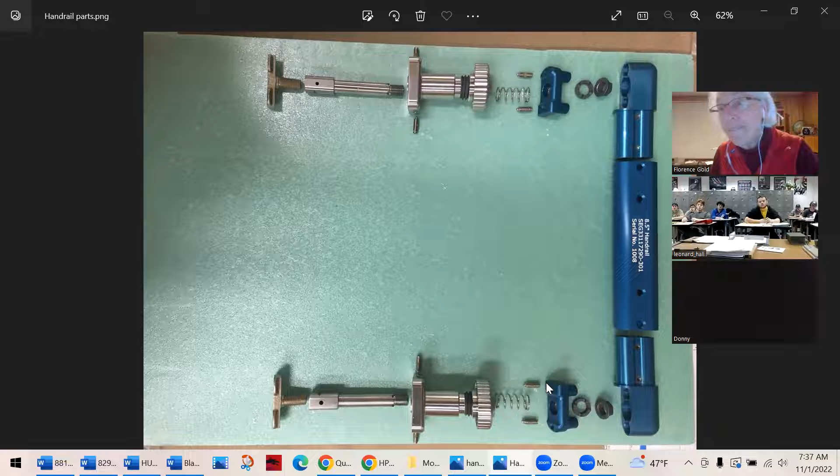Oops. All right, first I want to show you a little bit about, do you see the handrail? Yes. And the part you're making is right here. Is that right? You're making the tube fixture? Okay. Yeah. And you see how beautiful it is in a nice anodized, I believe, blue color? Because the astronauts actually hang on to part of that. Part of it slips into this tube, but this part is out of it. And it has to be like fine jewelry. It has to be smooth as silk, and it's a beautiful part.

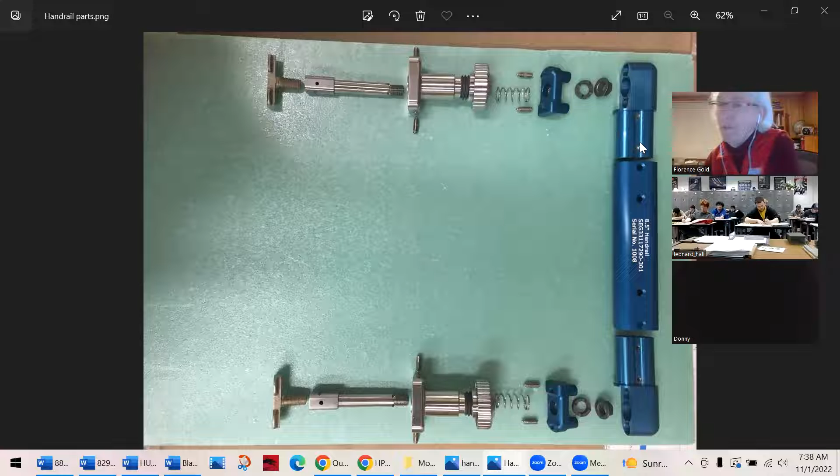The handrails are beautiful. And if you look at the space station, there's handrails of all different lengths all over the space station. And sometimes the astronauts grab it with their hands, but sometimes they put their feet under it to hold them down in place. And if we have time, I'll show you a video with that. But this is the tube fixture. I actually have it right here also. Whoops. Here it is. And this part right here is the part that is actually showing, and this part here actually goes inside the tube.

And then you have another part that fits into it, and this is why everything has to line up perfectly. So this is called the fixture cap, this right here, and that goes right in there. And everything has to line up. This is a precision made part for the astronauts. We can't have any loose, shaky parts to it. But I wanted to show you all the parts to the handrail, and yours is an extremely important part there. Anyone have any questions about that?

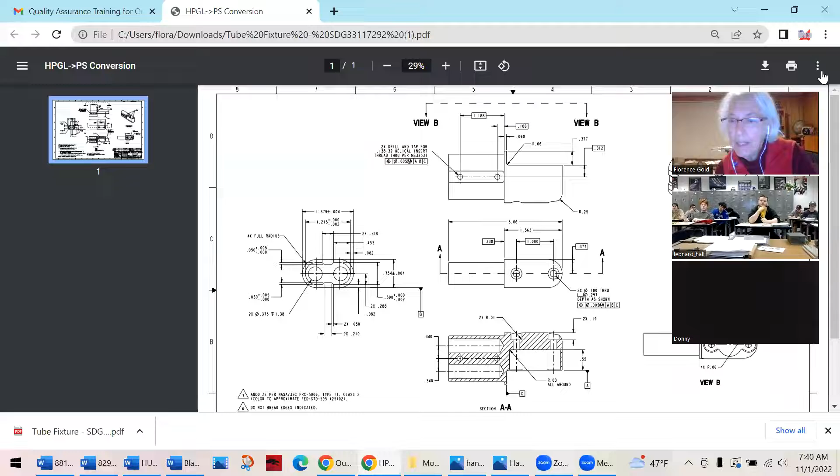Okay, so now I'm going to pull up the drawing. Let's see if I can find it in all my stuff here. Here it is. Do you see the drawing? Okay. And you have that drawing in front of you. So the first thing I want you to look at is down here, and I'm going to make this drawing bigger.

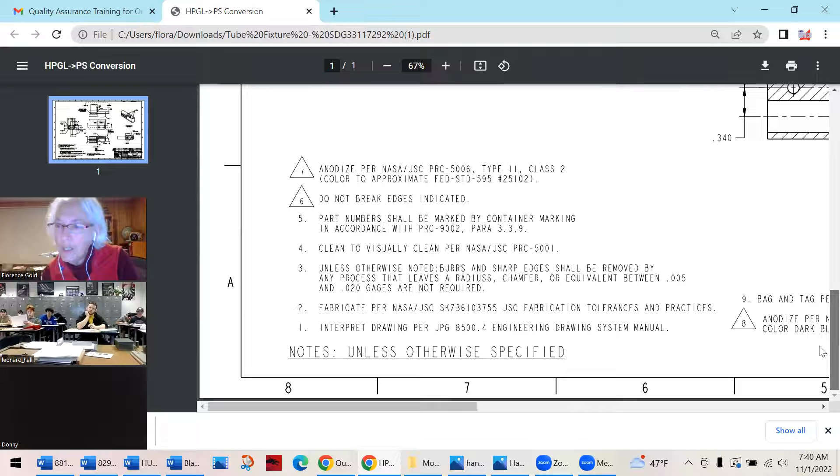One more. And go to the title block, which is right here. And this has some really important information that you need to copy and put onto some of the quality assurance documentation. But you need to make sure you're working with the right part. It's called the tube fixture for the handrail.

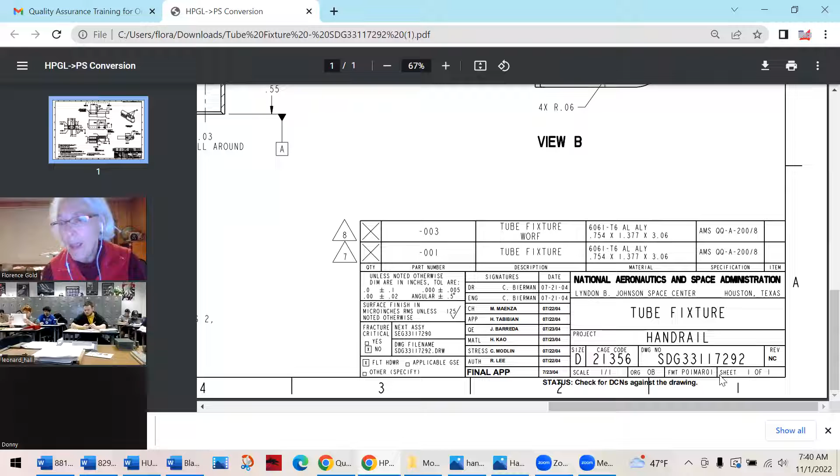And to double check, we put a drawing number for all our parts. It has this number down here, and all these numbers for all the parts that I have seen are pretty long like this, and they usually start with 3 letters. And we have here SDG33117292. That is the drawing number that goes on when you actually are making a baggie for it with labels that has that number. It's a very important identification number because every single little part you saw on that drawing in the handrail has one of these numbers besides being a title for it.

The other important part is right next to this number, and it says REV. REV, NASA loves abbreviations and acronyms. REV, anyone know what that stands for? Yeah, it's revision. And this has NC, which is no change, I believe. So the revision is no change. They did not change it.

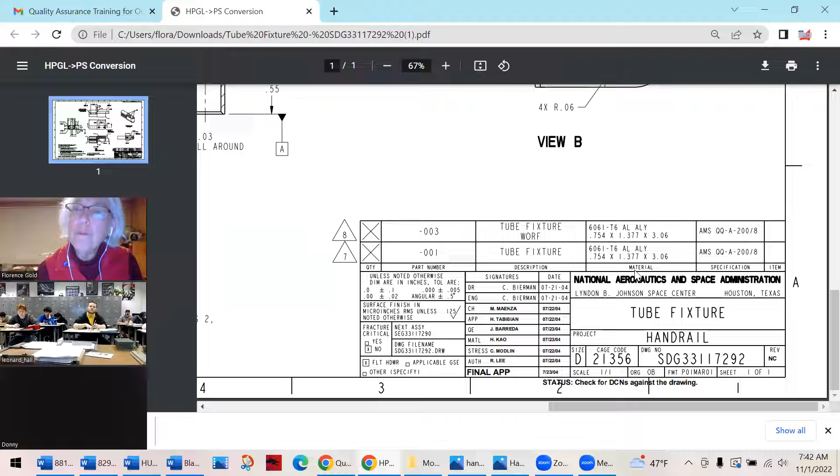But here above, right here, can you all see my cursor when it's going around like that? Okay. Above the word material, and you have it on your drawing, and we never do the WORF. We always do the plain thing that says tube fixture. So we're doing the -001. Above the word material specifies the type of aluminum alloy we are using. And there's all different types of aluminum alloy.

We're using the 6061-T6 aluminum alloy. Under it is a number, and that is measurements for a rectangular bar to purchase, but we don't go by this number. We go by what the teacher thinks is appropriate for their machines to build this tube fixture. So the only important part above material is that 6061-T6. We have to have that on our documentations, where I will show you in a minute.

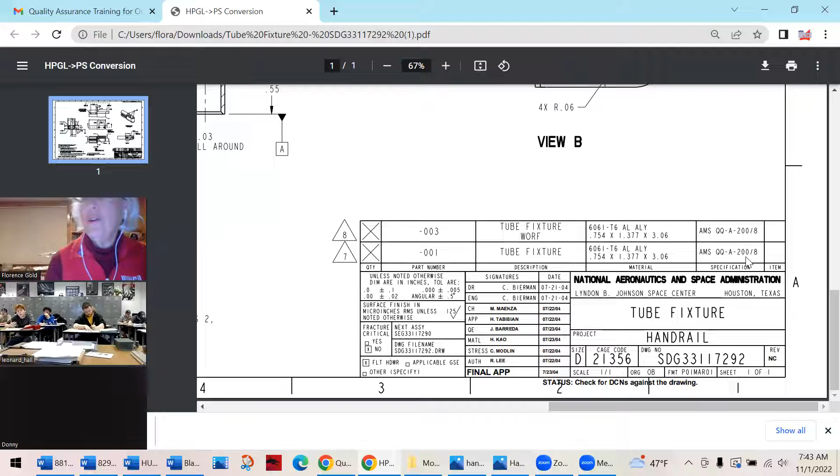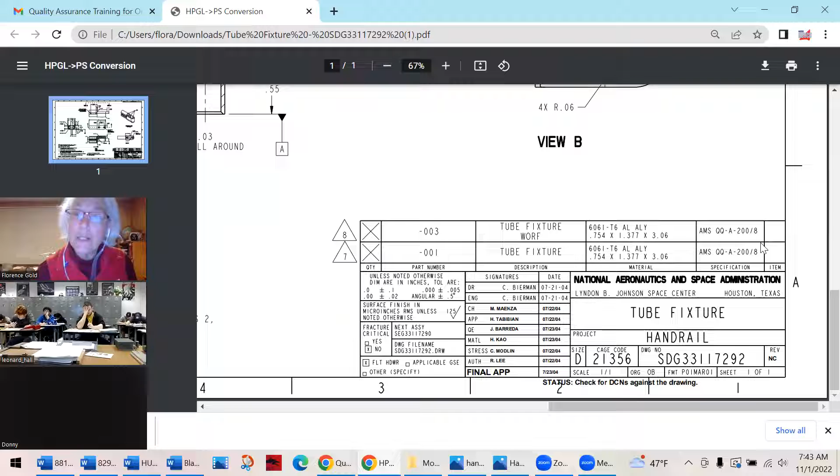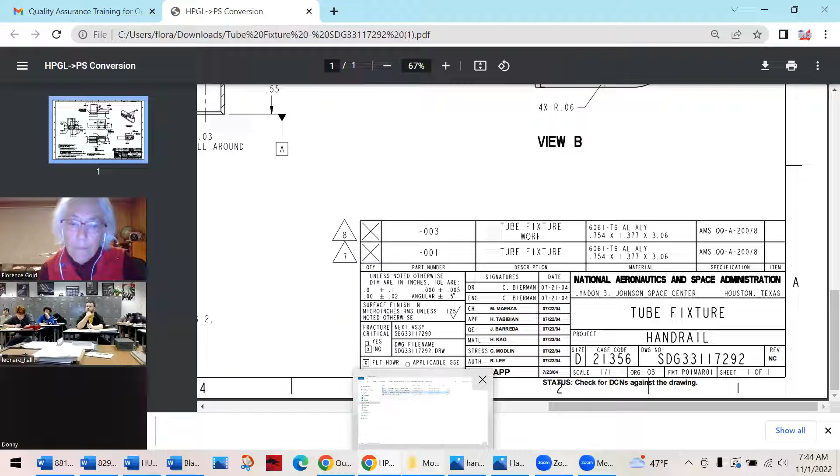And then the other thing is the specification right next to it, the word specification, the AMS-QQ-A-200/8. That specification also has to be on our documents that we include with our parts. And that specification and the material will be listed on what we call the certificate of conformance, which I actually think I might show you now if I can find it. Wait a minute, let's look here if it's here. No, it isn't there. But I will show you the certificate of conformance shortly.

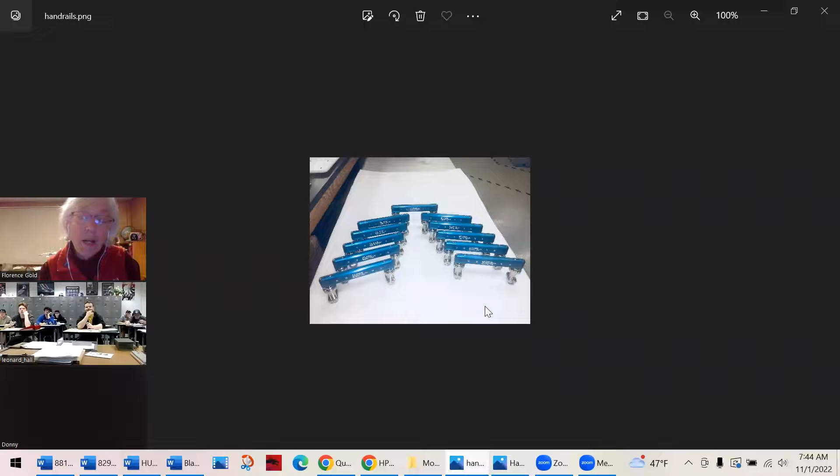Oh, here's a nice picture. These are the finished handrails. We sent already 11 up to the astronauts, and they want more. So you are working on sending more handrails to the astronauts.

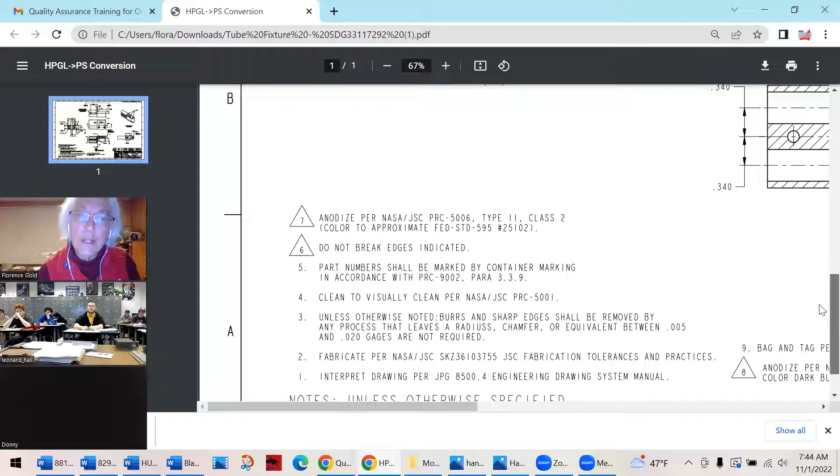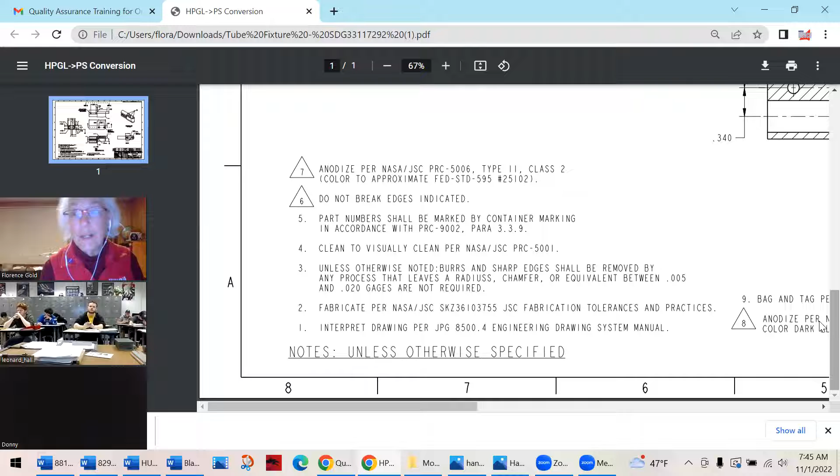Okay, let's go back here. The notes are very important also on the drawing, and the notes are usually found in the bottom. Note 7 says anodized per NASA. Guess what? You do not anodize it. We will anodize it. Actually, we send it out to a shop to get anodized because that involves a lot of chemical process. It's a big process to anodize. But in order to get a beautiful anodize, that part has to be precision made and as smooth as silk, as finished as much as possible.

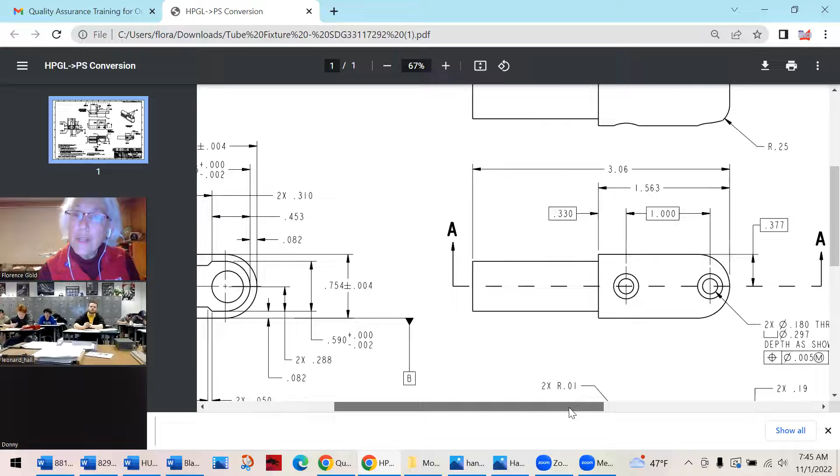And so note 6 says, do not break edges indicated. And that actually, I have never seen on any drawing except for this one, because we always want to break our edges. But on this drawing, we don't want to break our edges. I'm going to stop sharing because that's an important part. So here's your fixture cap. Everything is nicely rounded, no sharp edges, except one spot.

And that's right here, that this part of your tube fixture has to be sharp because this fits into it, and it has to be like one. You don't want a round edge there. Does that make sense? So you got to be really careful because always we want round edges, just not on this top right here, because this has to fit into it, and it just has to be continuous. So those notes on the drawing are really important. You need to pay close attention to all those notes.

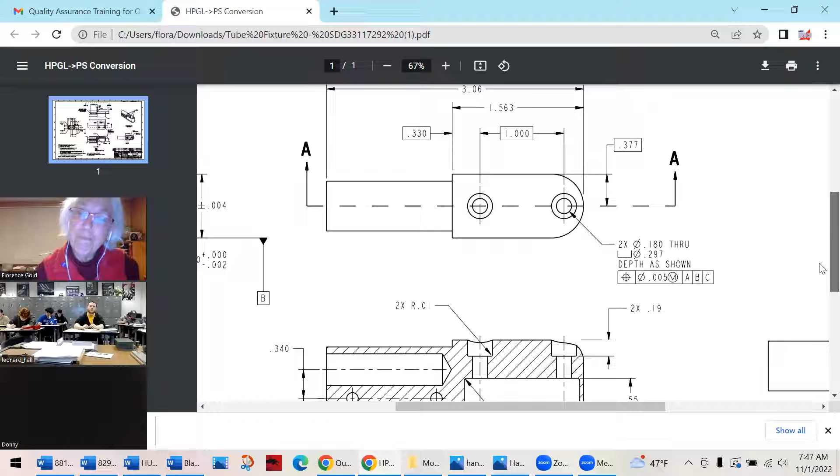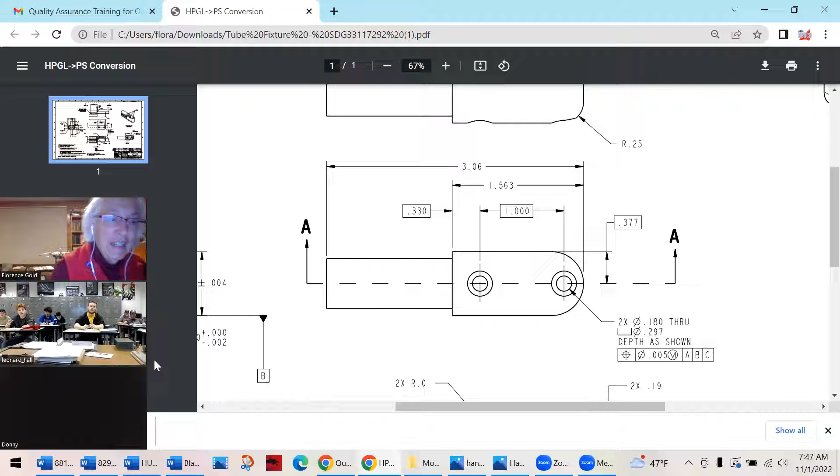The other thing that I don't see on this, but is on the test, is what does DIA stand for? And there's no DIA on this drawing. Instead, there's a circle with a slash through it. But my geometry students know what DIA stands for, right? What is that? Diameter. Diameter, right. What does R stand for? There's a lot of R's.

Radius. Right. Good job. When you all talk, I can really hear you. All right. So I don't ask about the R on the test, but I do say what is DIA. But you guys have this circle with a slash through it.

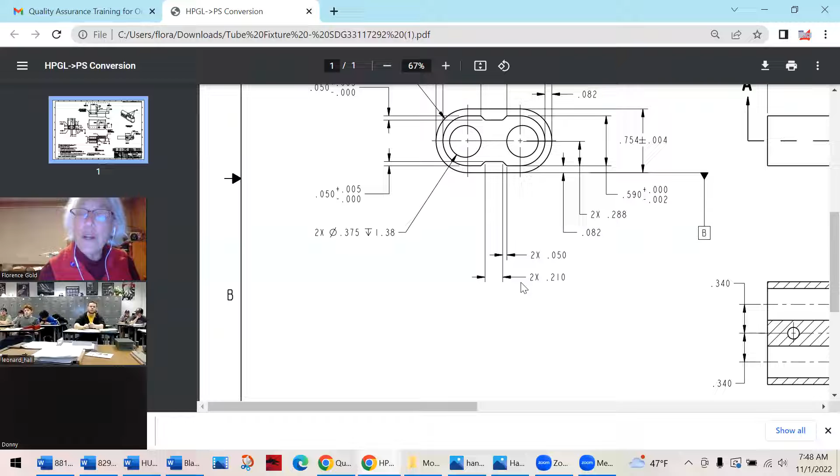Another very important part whenever you're doing any of the quality assurance work is the drawing takes precedent over any of these forms that I'm going to show you. And there's just 2 forms we're going to go over. But if the drawing says, hey, it's plus 0.005 of an inch and minus 0 of an inch, that takes precedent over whatever the quality assurance paper says. So when you're doing your quality assurance papers, you need to have your drawing right in front of you, because the tolerances in this drawing are the most important.

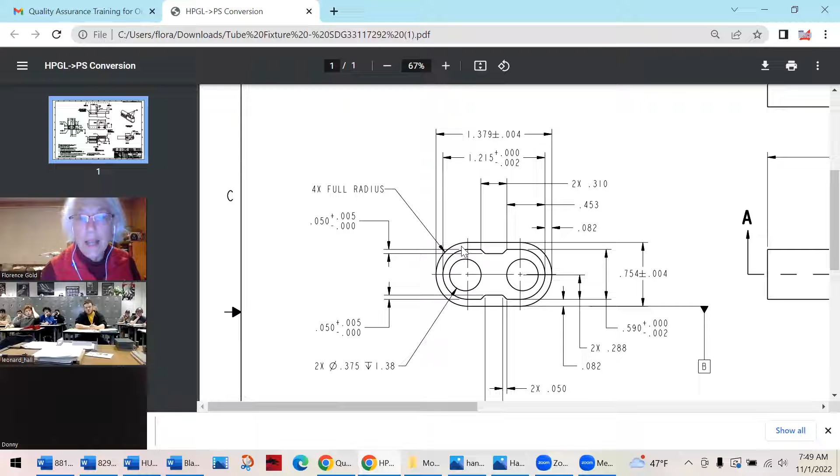There could be a mistake in the quality assurance paper. I have not had another person make a fixture tube. So you're one of the few who are making a fixture tube, and there definitely could be mistakes because not a lot of people have made this that I know of, at least. And the 4x means 4 times. 4x, the full radius. And you have special gauges to measure radiuses and diameters.

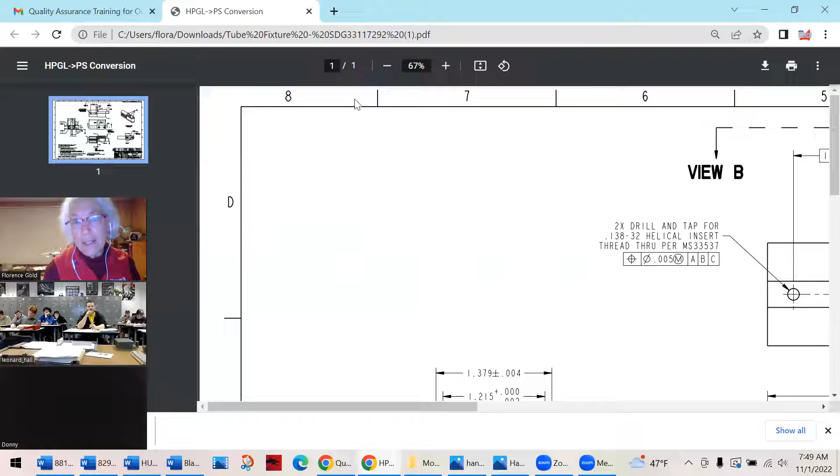And the only other thing I want to make sure you understand is how the drawings are like, I like to say, the Cartesian plane in geometry, because the Cartesian plane is the XY axis, and here the X axis, which is horizontal, goes across the top with numbers, and the Y axis goes vertical, and it has letters, and that's how you indicate where your measurements are.

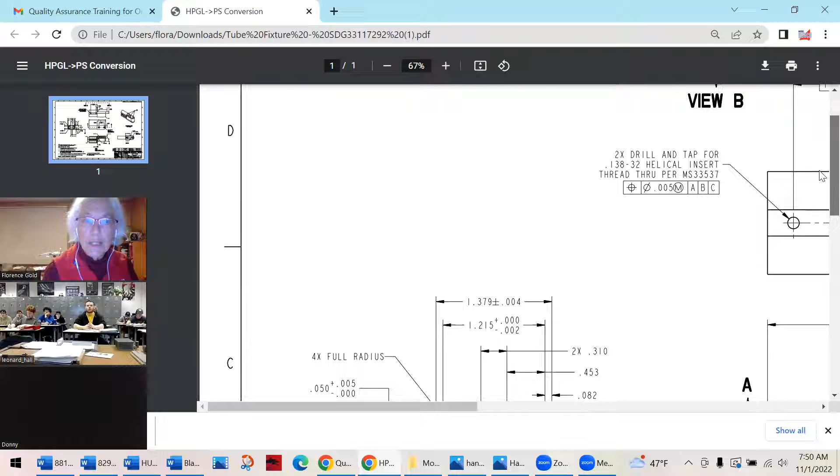So if I wanted a measurement in this area, that's C, it would be right in here, and it would be C8, right? Can't see C when I go to 8, but it's right in here. And we'll look at that again. I actually made this probably a little too big. So maybe now we can see it. This is in C8. This is in C7. But do you all know how to read that? Yeah. It used to be on maps, but you Google Map things now, but it's also in mathematics.

All right. So now we're going to start on the documents for this. And do you see the document now that says sub-assembly process sheet? And do you have a copy of it? So you can write on this, and I'm going to give you the first one of the questions on the test. There's only 14 questions on the test. The one question says that these quality assurance documents are legal documents, and any legal document, you should not use pencil. You have to use black or blue ink. So write that down if you can't remember it. It's a question on the test. Use only black or blue ink.

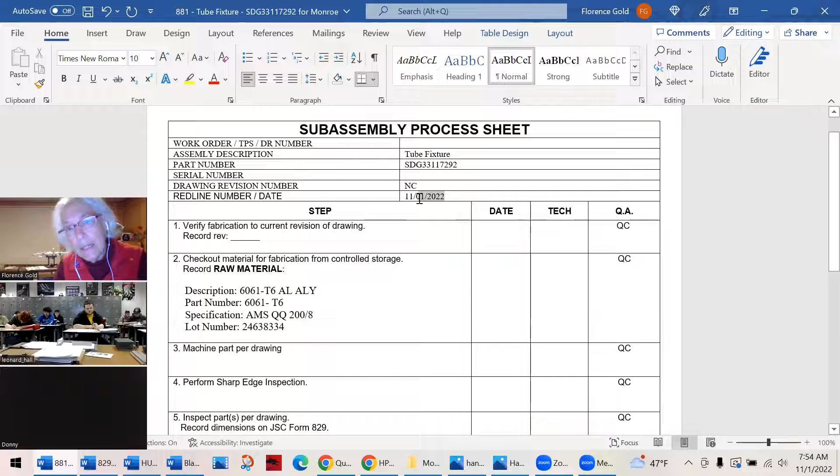And I like actually that you put it in this order, but the important thing is that you have the month, day, and the year. And that's a question on the test. Do you have to include the year? And I put out the whole year 2022 just to make sure, because the 22 could be a day of the month. So it's real important. I've watched quality assurance people check our papers, and if we didn't have the year on them, she had to go back and we had to put in all the years. So put in the month, day, and the year. That's real important. I'm gonna highlight it too.

So that was the second question on the test. First one, black or blue ink, no Sharpies. This one is you have to include the year when you put the date. And that's all you fill in on this square. Everything else really is filled in for you. But you have to remember to put the date. We don't have a red line number. We just put the date.

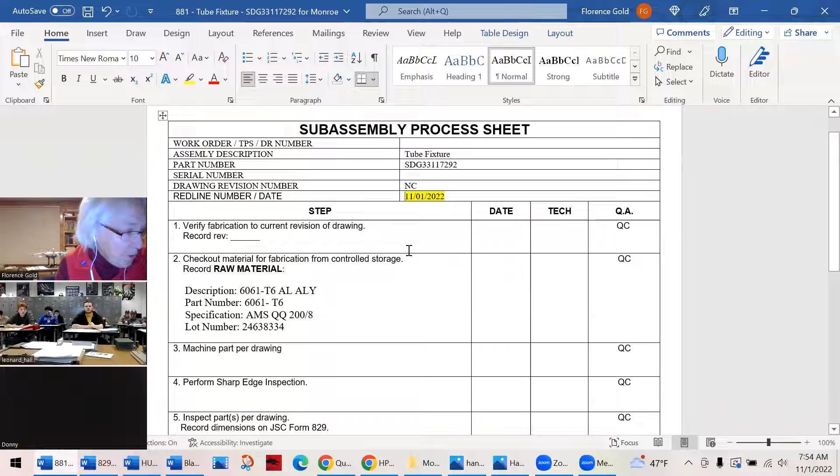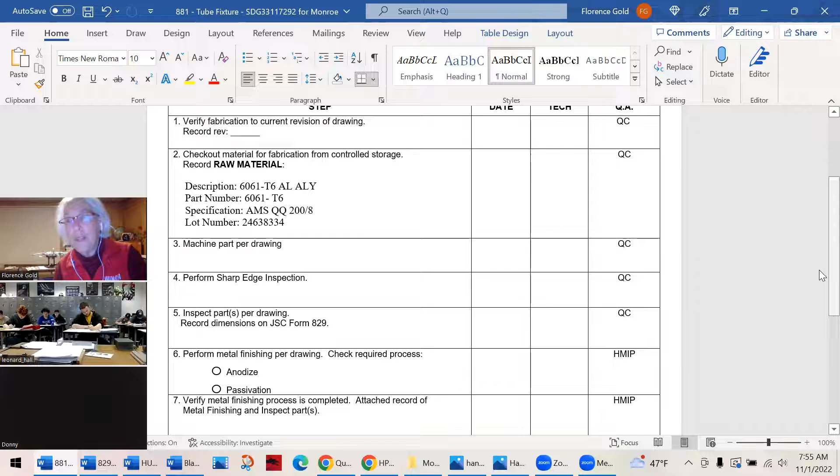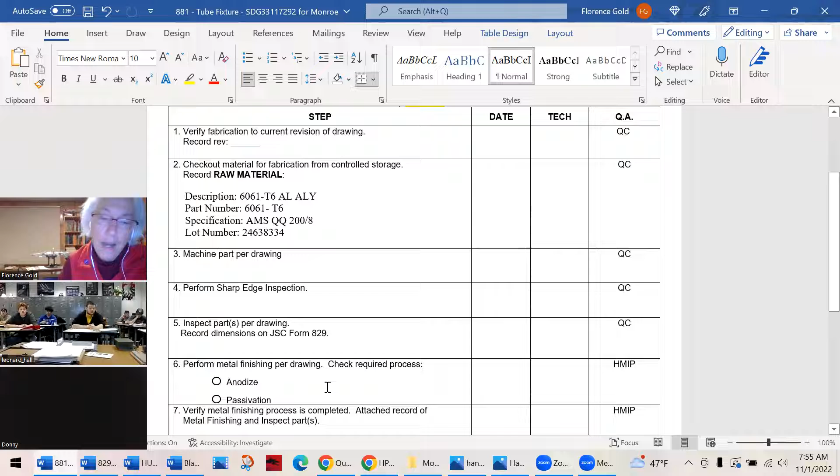All right. The third question on the test is you only fill out the top 5 steps in this form. 1, 2, 3, 4, 5. Because if you look, the 6th step is about anodizing, and you don't anodize it. NASA anodizes it. NASA will fill out these other steps, and there's 10 steps, but only you fill out the first 5. And I've had kids get that question wrong. So write it down or indicate it somehow that you're only doing the first 5 steps. You don't anodize it. NASA will do that and finish off the whole process.

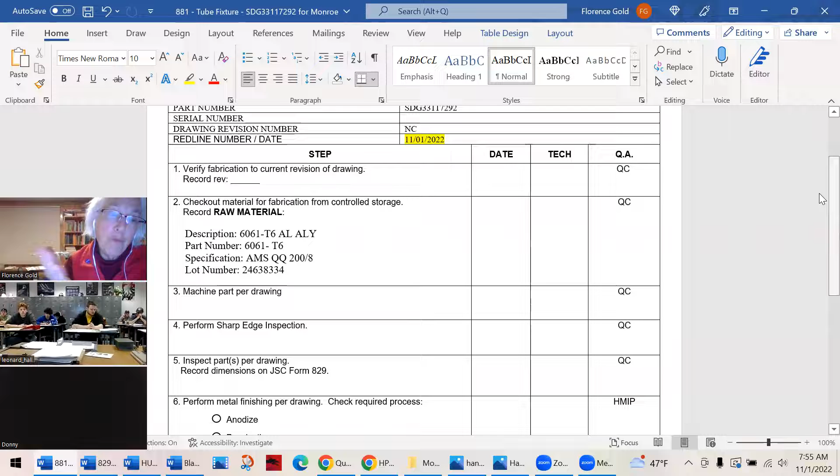Okay. So step 1 is easy. Record the revision, and we already know that it's NC, which I believe is no change. You put that in there, you date it. NASA likes 2 people on all their quality assurance work. So one person will be the technician who's making the part. So they'll put their initials down. And the other person is going to be our quality assurance person.

I think Jean brought you some stamps. Is that right, Mr. Hall? We'll be getting them pretty soon. Okay, I know he picks them up at Johnson Space Center because I was all out.

So these stamps are like your signature. And the question on the test is, can you share your stamps? No, you don't share your signature. You don't share the stamps. You put the stamp in a secure location, and only you can use it. And your teacher will give Jean the name of the student who's assigned this quality assurance stamp.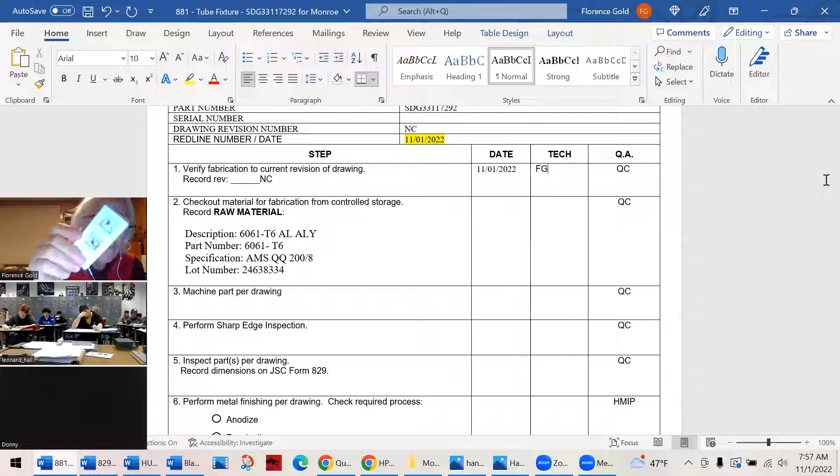So this form, which is called the subassembly process sheet, I don't know if you can read this, but it says JSC Form 881 down at the bottom there. So I like to call it Form 881. And you have to have a QC stamp. So there's 2 stamps, a QC stamp that just says QC and then has a number, and an LM, which stands for linear measurement, and it has a number.

But only the person who has the QC stamp can stamp this form. The LM stands for linear measurement, and that's for this other form we're going to see. The QC stamp can stamp this form or the other one. So the QC stamp is the more kind of powerful stamp, you could say. But only the QC stamp can stamp that.

So the person, I don't know what your number is, but we'll put 102. And you stamp that. You put that stamp in a secure location. Don't share it. And if you lose it, you think you're in big trouble, but you're not. Just let your teacher know, and he will tell Jean, and we'll take your name off that stamp and we'll give you another one. So don't stress out over it, but keep it in a secure location, because if somebody finds it, that's like your signature. All right. Any questions on step one?

I have a question, Flo, again. I have two students with the same initials. Should we differentiate? Oh, yeah, maybe use the middle name. Okay, but in reality, the person who's responsible for this is the person with the QC stamp. When you stamp this, you're saying it is correct, it's good. And we would trace it, because most times we can't read initials anyways. But we will have on record, and I have the list from many years now of kids who have those stamps. But yeah, use like the 3 initials if they have them. That was a good question. I've never had that question.

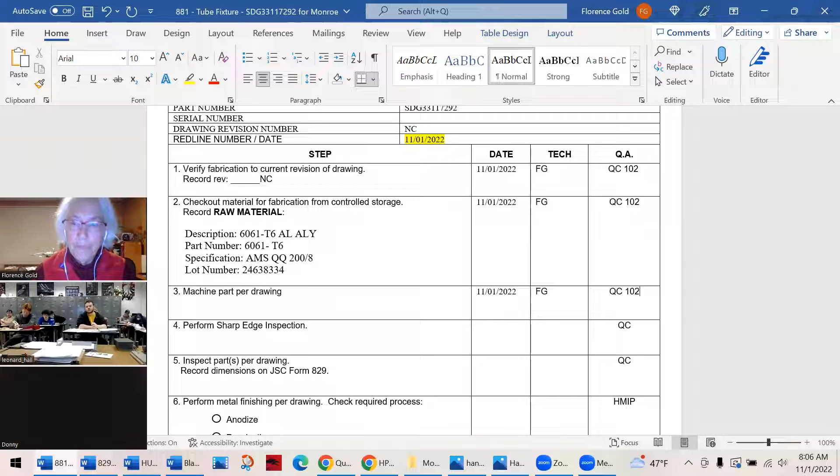Any questions on step 2? Step 3, machine part per drawing. Just make sure, double check, 2 people, you're machining the part, and date it, initial it, and stamp it. So that's pretty easy. Step 4 is hard. And the reason is what we've been talking about, that your part has to be so well precision machined and no sharp edges, except in this one case. You do have a sharp edge right here, but all the rest has to be as smooth as silk.

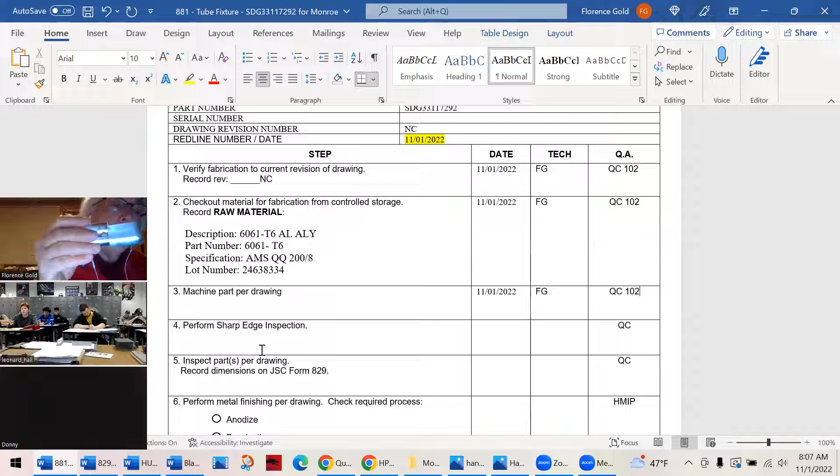And I'm not a machinist, but I believe if you take your time and make this using the correct speeds and feeds, what they call, and not be in a rush, you will come out with a really nice product, and it will take a lot less to get rid of all the burrs and just keep it as smooth as possible. But there's also a lot of what we call control process that is involved. And that's real important, because we can't have any scratches.

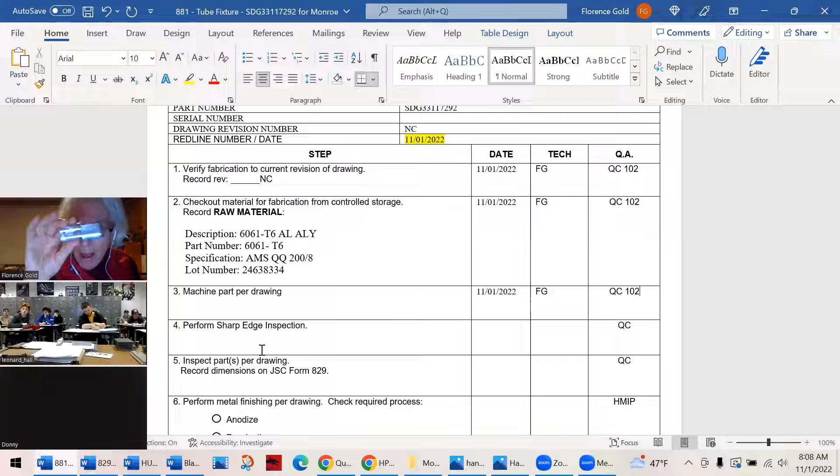So when you're working with your material, even your raw material, make sure it's on a clean surface. Even if you have to clamp something, make sure the part doesn't get marked up. No Sharpies at all on this part. You do not mark your material with any marks whatsoever, but Sharpies seem to be the thing that some people do put on their parts, but no Sharpies at all. Your hands even need to be clean. Your surface area needs to be clean. No dragging the material across a surface.

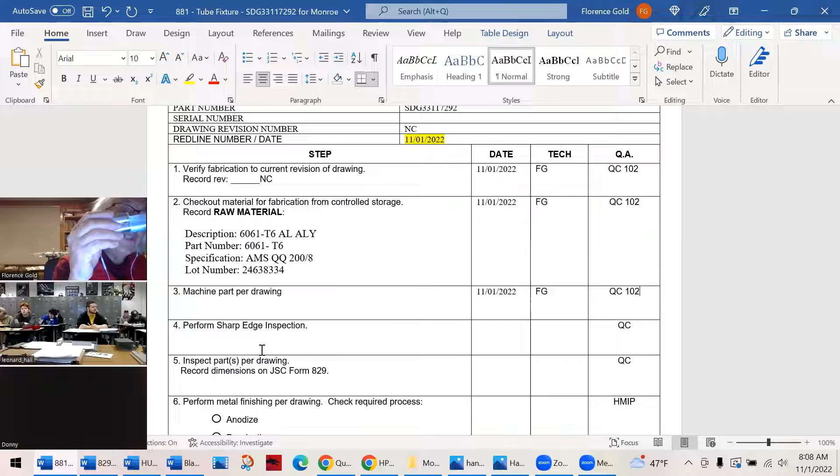So the cleaner you keep this, the better and the less work you'll have to do to get rid of any scratches or anything. It takes a lot of finesse because you can't change tolerances, but you have to round the corners and get rid of the sharp edges. Any questions about that? That takes a lot of patience.

All right, well, if you need any special help with that, I think we're going to make a video about it, because if it isn't as clean as we need it, then the people that Donny's working with are going to have to polish it up, and that takes a lot of time. So we appreciate when the students do it. But it is time consuming.

And you're right, Flo. It's very much of a finesse activity. It's like making jewelry. You can have a beautiful part come off of your machine, very good tolerance-wise, and look wonderful. And you can hack it all up when you're rounding the corners, and that happens at every level of machining. So the better you get at that early on, the better of a machinist you'll be.

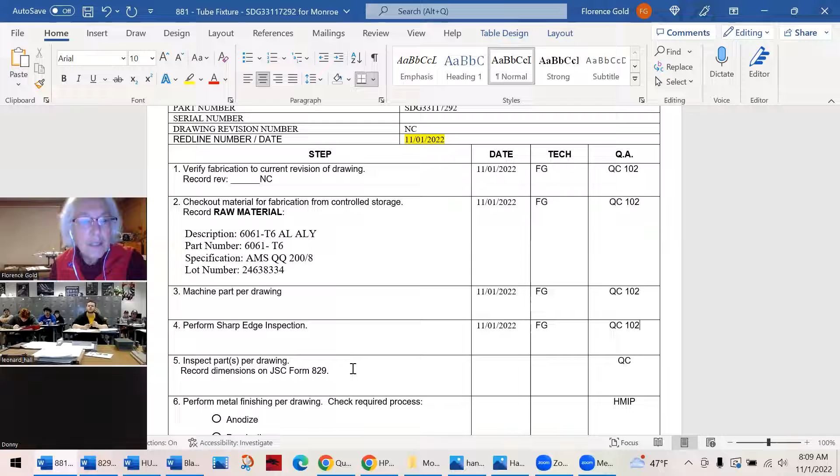So would you say if they control their speeds and feeds, that helps with it? Yeah, it does. The better it comes off the machine, the easier it is to do a little final finesse on it. Because if you have a really big burr hanging off because your tool was dull or something, then you pretty much have to use some kind of a file or something to clean it.

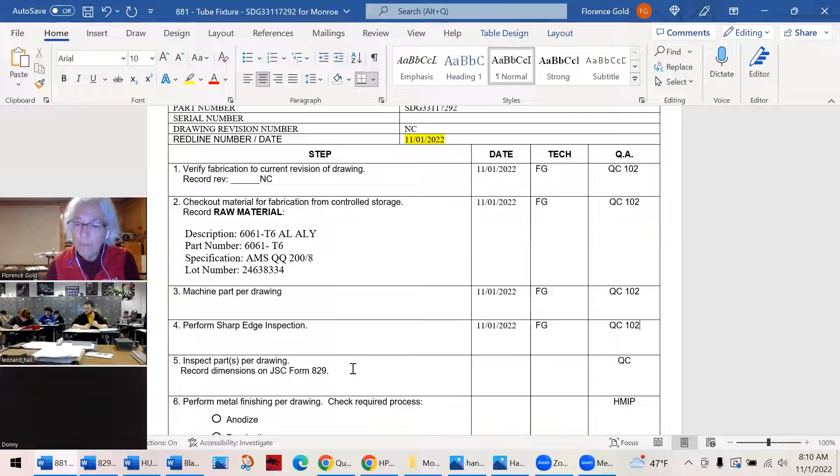But if your tool's sharp, like you're saying on this one part, it's calling for a sharp corner. An actual sharp corner per one of our drawings that documents all of that. It's called the SKZ drawing. A sharp corner is up to 3/1000 radius. Wow. So it's not able to cut you, but it is a very sharp edge, basically.

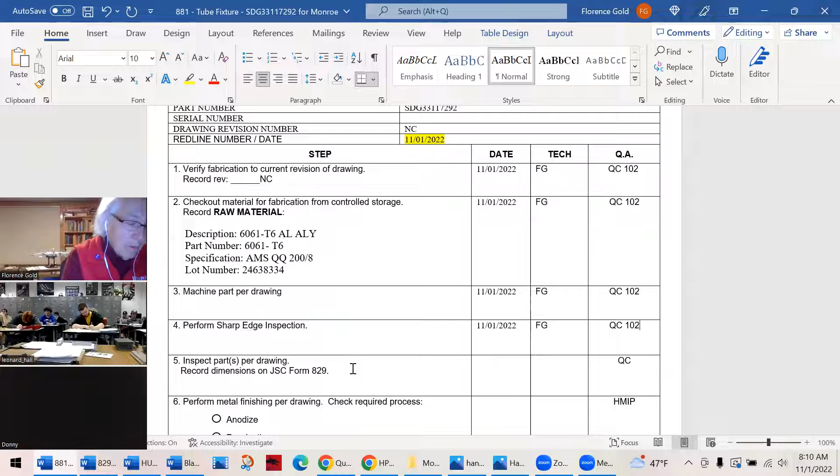Generally, when there's no call out for a break edge, it's 5/1000 to 20/1000 radius. And that's pretty much across the board for flight material. And again, it's just protecting the astronauts and keeping the hardware in good shape. Right. And that's really important in this part because it's the handrail where they're going to grab with their hands. So that's really important. So take your time.

We don't want to pressure you into building this real quickly. We'd rather have it precision made and as beautiful as possible. Absolutely. Thank you. Thank you, Tani.

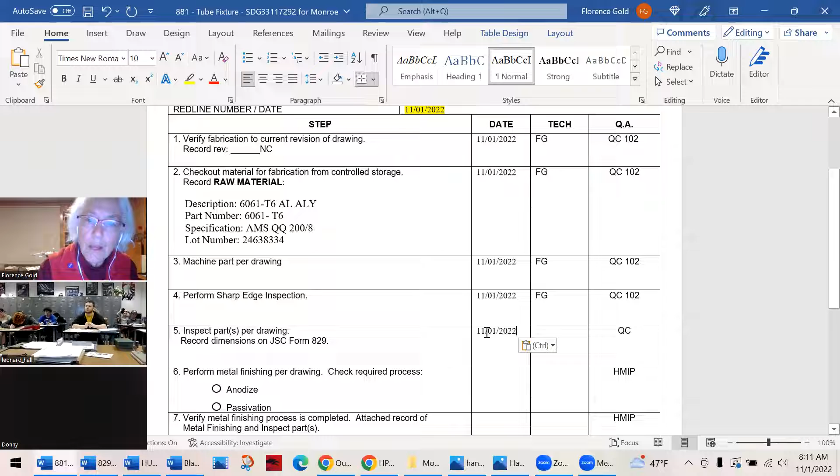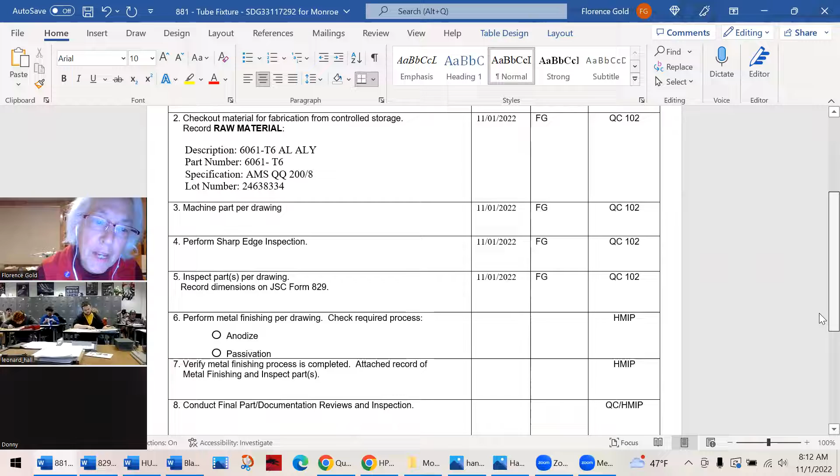Okay. And the last thing is another inspection sheet. And here it's called 829. And that's the linear measurement inspection sheet, which we will do right now. And I'm just going to date it, initial it, and stamp it. And when you stamp something, it means you're good to go. That's giving it its approval. You stop there; NASA will anodize, NASA will do these next 3 steps. So you only do the first 5 steps. Any questions on this sub-assembly process sheet or 881? Okay. Right.

So I'm going to pull up the next sheet, which is called the Dimensional Inspection Report. It's the linear measurements. And this is all about tolerances and measurements. And you all know how to use a caliper, is that right? Because reading a caliper and telling its tolerances is one of the first questions on the test, but I'm not going to teach you how to read a caliper. So again, I want you to check that this is the tube fixture and it has the right number. And this even put the 001 in there, which is the right number.

The only thing you're going to put on this, and for some reason this form never lets me write on it, is the date. And the important thing is the month, day, and year. The year is the thing that people leave out, but you have to do the year. You cannot do this in pencil or Sharpie or orange or purple ink. This is another legal form, and it's black or blue ink.

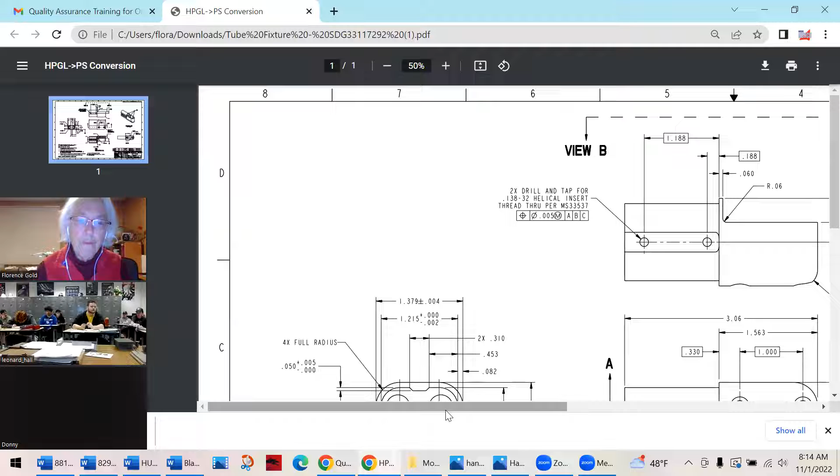We'll go over each of these columns now. The print zone, that's where we were looking at the C8, the X and Y axis, I like to call them. But let's see if I can pull up the drawing again. And you guys all have that drawing in front of you. Okay, so the first one was C8. So let's see if we can, oh, there. So C8, here it is, the 4x full radiuses.

Now, the question becomes, how in the world do you put 4 measurements in that one little space? So it's asking for 4 full radius measurements. Do you think you could put 4 measurements in here? No. I think I heard someone say no. Well, what I want you to do is measure it 4 times, right? And if all of them are in tolerance, you can put 1 or 2 in there, put the ones that are in tolerance in there.

If one of those 4 measurements is not in tolerance, then I want you to put the one that's not in tolerance in there. Because if one of those 4 measurements is not in tolerance, we're going to highlight that and we're not going to stamp that row. Because anything that's not in tolerance is not good. So even if one of those isn't in tolerance, that piece isn't perfect. And we don't want to stamp it saying that it is perfect. Does that make sense? Yeah. But if you can put the 4 measurements, put the 4 measurements in there.

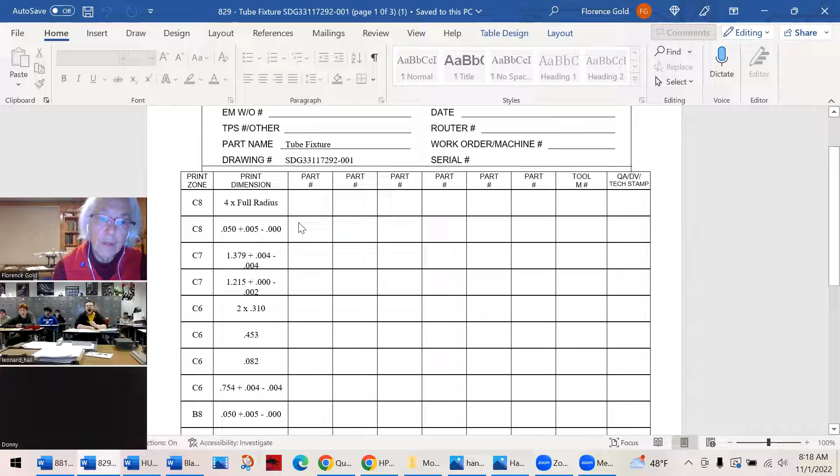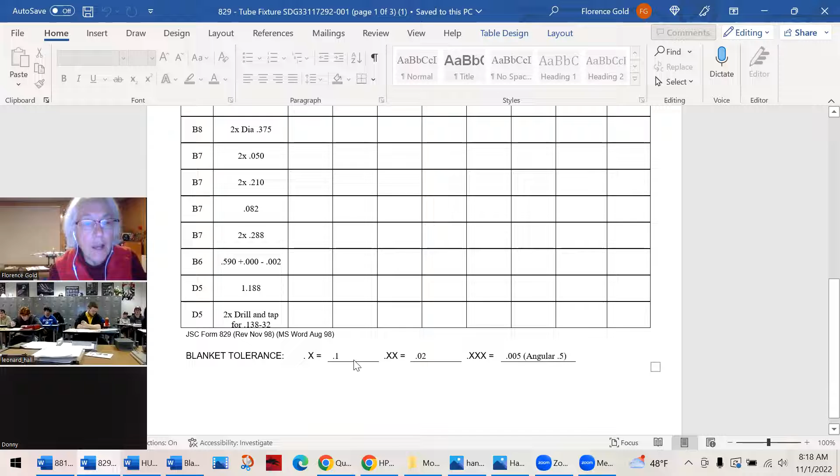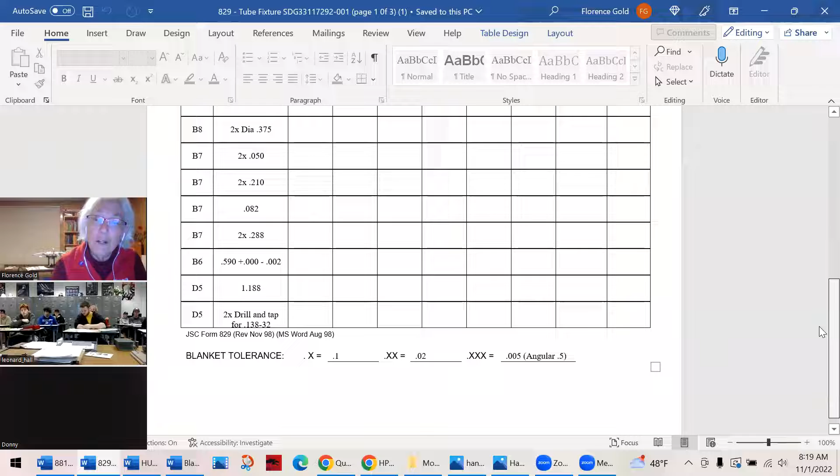On the bottom of this form, we have some tolerances, but they don't take precedence over the drawings. So if it's a different tolerance that's on the drawing, then you use the tolerance from the drawing. And everything, by the way, is in inches. NASA only uses inches. So this is 100 thousandths of an inch, 20 thousandths of an inch, and it's plus or minus. And this is 5 thousandths of an inch, very little, plus or minus. But a lot of these have other tolerances written right into the drawing, and that was just copied. And there's a DIA on the thing, that's a diameter.

All right. Now when you're measuring like 5 thousandths of an inch, you need to make sure your caliper is well calibrated. And that's what this column is for, to put down what tool you use to calibrate your measurement devices. So if you're using a caliper, usually it's a 1-2-3 block, but we need you to keep your measuring devices in really good shape.

And by the way, when your teacher was mentioning the tools not being sharp, if your tools aren't sharp enough, if they're wearing, you need to tell us, and we will get you new tools, because it's a real detriment to work with tools that aren't sharp enough. You might be doing everything perfectly, but the tool isn't as good as it can be. So we purchased the tooling for you, Mr. Hall. So if you need any tooling, you just tell Jean.

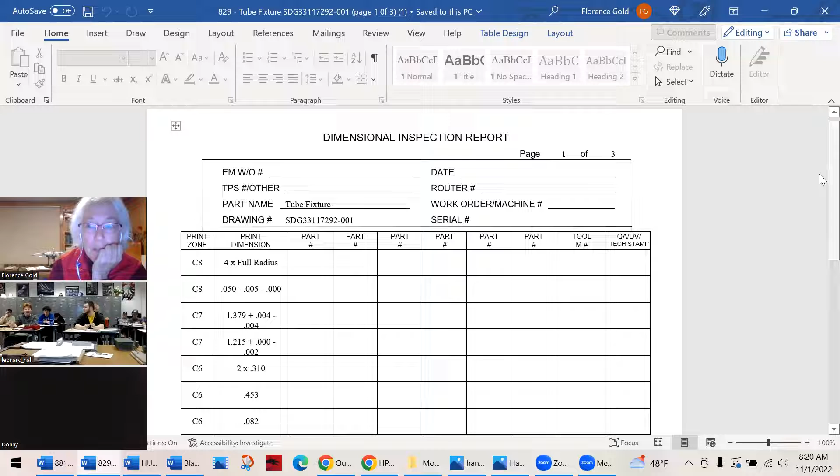Does that make sense? We don't want you to lose measurements because your tools are no good. Yeah, sounds great. Yeah, and we have a request form that you can fill out on that. And I've seen it happen. The kids are making parts and the tool wears out, and really then their tolerances are off. So we need to make sure you keep really good calipers and tools to make these parts.

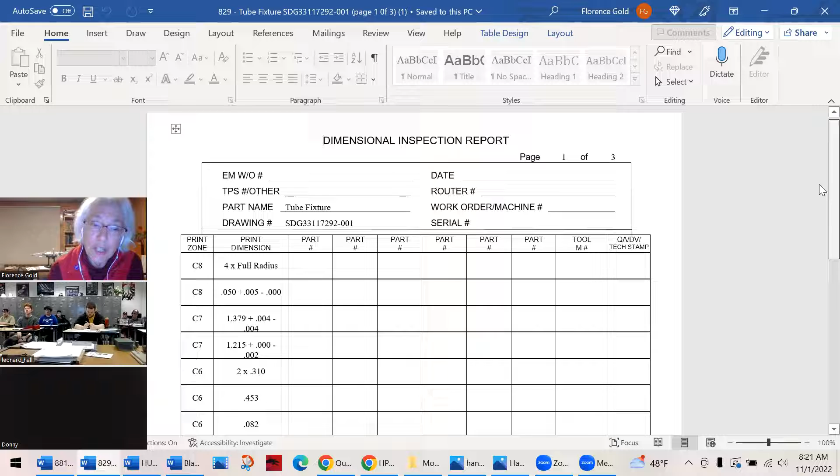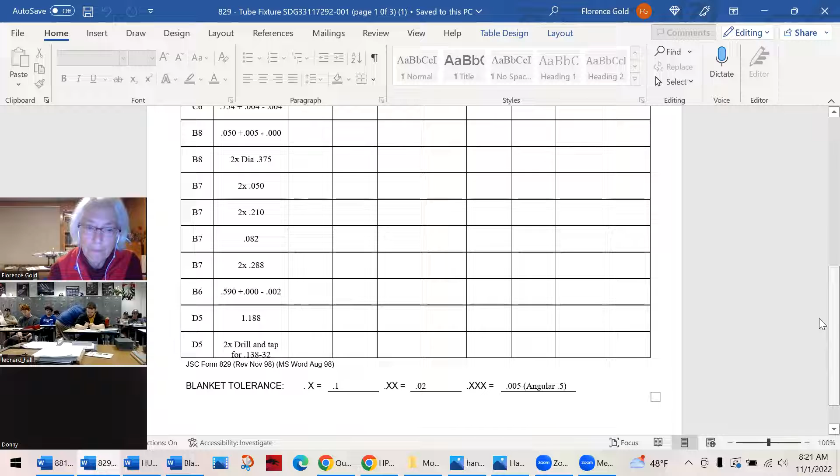So here, if it's all 1-2-3 blocks, you would just put a 1-2-3 block, and you can put a line down there. But there are 3 pages of measurements. That's a lot of measurements for this part. That's going to take a lot of time to fill out those. This is just page 1. And stamp every row if everything is in tolerance. Any questions about that?

So I know you might want to do this in pencil because you could erase your measurements, but 2 pairs of eyes on this also. The way to do it is one person measure the part and one person write it down, and then switch. The person measuring could write it down, and the person writing it down could then do some measurements. But we need 2 pairs of eyes. One person with the QA or DV stamp will stamp it. All right. Everybody good? Everybody good with this form?

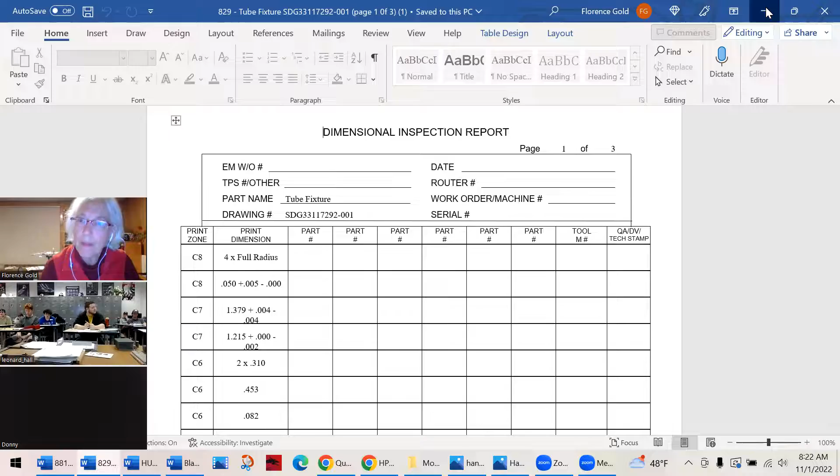All right. So I actually want to show you one other thing, let's see if I can find it. Maybe it's in here. Yes, it is. All right. Do you see this space flight hardware manufacturing quality assurance and inspection form? Do you guys see that? Okay. You probably don't have this one. But this is what we send to you after we inspect your parts.

So when I tell my teams to make 6 parts, put each part in a baggie and put your label. So I sent you labels, put your label on it, and your label will have a number that will correspond to 1, 2, 3, 4, 5, 6 parts. So this is part 1 on that form. Don't put the label on the part. Put the label on the baggie. Don't put anything on the part. Do not mark the part at all, and keep it as clean as possible.

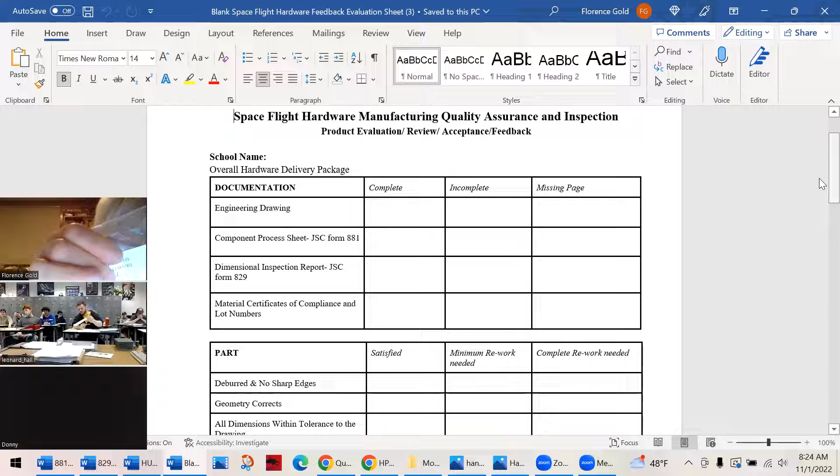So I tell my teams, and I don't know what Jean's going to do, but I tell them the first 6 parts that you make, put them in the bag, put the label on them with all the documents and send them to, now it will be Donnie at Johnson Space Center in Houston. And he will inspect the parts, and then you can make more. Donnie, is that something that you would like, or what are you thinking? I'm honestly not sure what the process is yet, Flo. That sounds good. I'm gonna be looking at them eventually, but I do know Roy had been asking for sample sizes like that first before we go full bore and make everything.

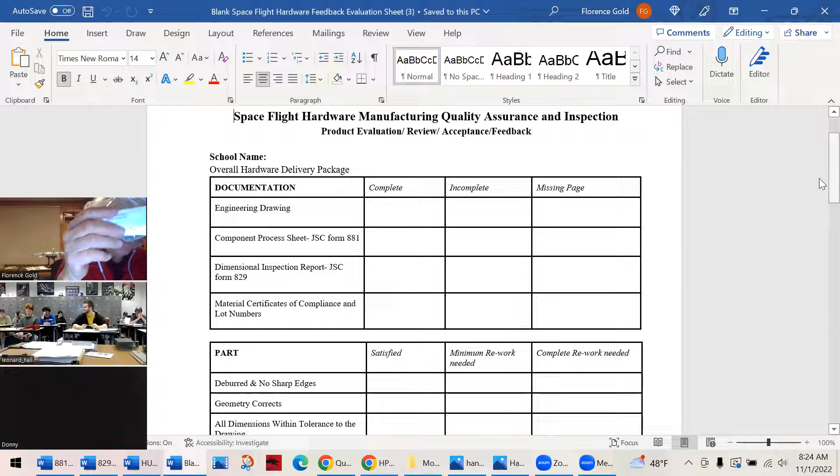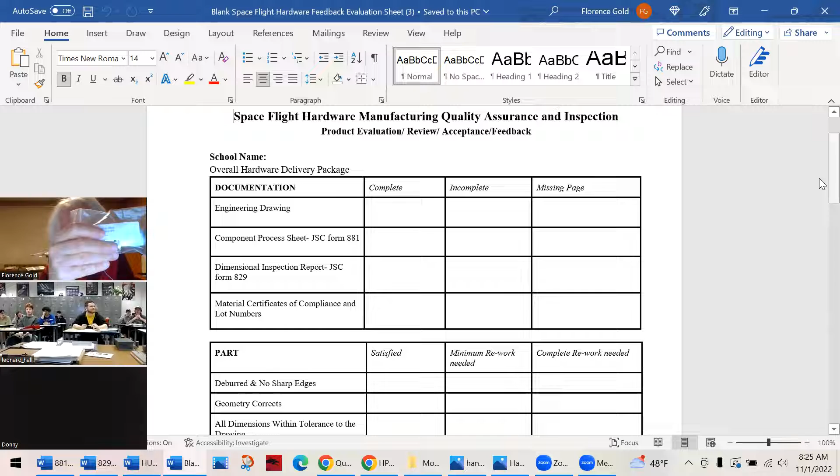Right. So what we really appreciate is when the students actually check these parts while they're still on the machines for tolerances. So you check this as you go. Don't take it off the machine, but check what part measurements you can while it's on the machine. Then when you have to flip it, you can check again. You continually check for tolerances. That's the important thing. But usually you bag them, you put the label. That's a question on the test. Bag them, put a label on the bag, and send them to Houston.

And once you send it to Houston, this is the evaluation sheet you'll get back. And I really like this evaluation sheet. It's kind of a summary of what we do. And here's the documentation that has to accompany all your parts. The drawing, that's what we've been looking at, okay? The drawing, the process sheet, it's called subassembly process sheet. This one says component process sheet, but that's 881. The dimensional inspection report, which is 829.

And the other thing, which I didn't show you, because for some reason I just showed you a paper copy, is what I call the certificate of conformance. You can call it CERT, but it's the one with the lot number. These 4 documents you absolutely need to include. And if you do, you get complete. They'll check that off. And that's the easy part of this process.

The next part is the part, deburred and no sharp edges. And it has satisfied, minimum rework needed. And a lot of students get that minimum rework needed, but try to take the time and do it as best you can. Like Donnie said, it takes a lot of finesse. Or complete rework needed. And I've had that sometimes too.

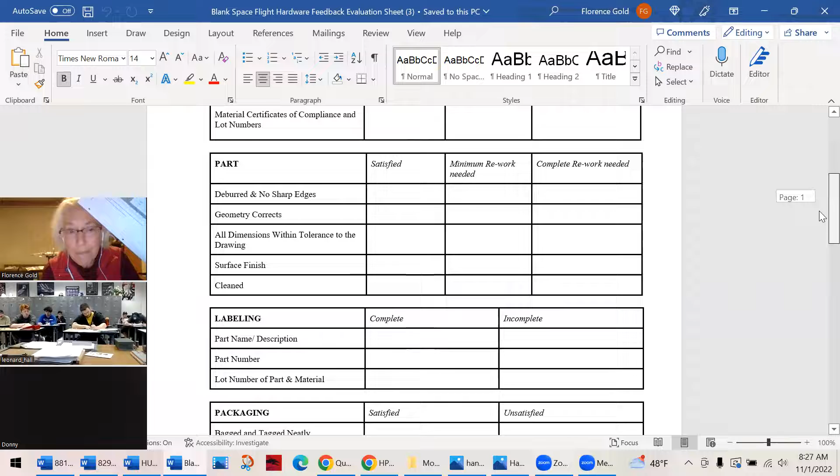The labeling, you shouldn't have any problem because I put the part number and the description on the label, and the lot number has to be on the label now too. All those things. Mr. Hall, did I already send you that information? Did I send you the labels? Yeah, so you'll get that all complete.

And then packaging, bagged and tagged. Each part has to be in its own bag and tagged, and separated as best you can so the package is neat and the parts don't get damaged. And we send you UPS prepaid labels for mailing that out to us. And then there's always a spot for comments, and they usually say, great work. Thank you so much.

So the hardest question on the test is this one right here. What are the 4 documents that have to accompany your part? The drawing, Form 881, Form 829, and the certificate of compliance. You can call it the CERT or the COC. That's the hardest question. But this is a good review of all the things that we just went over. Any questions on this sheet? You don't fill it out. Donnie and George and Carlos and all the people in Houston will fill this out for you.

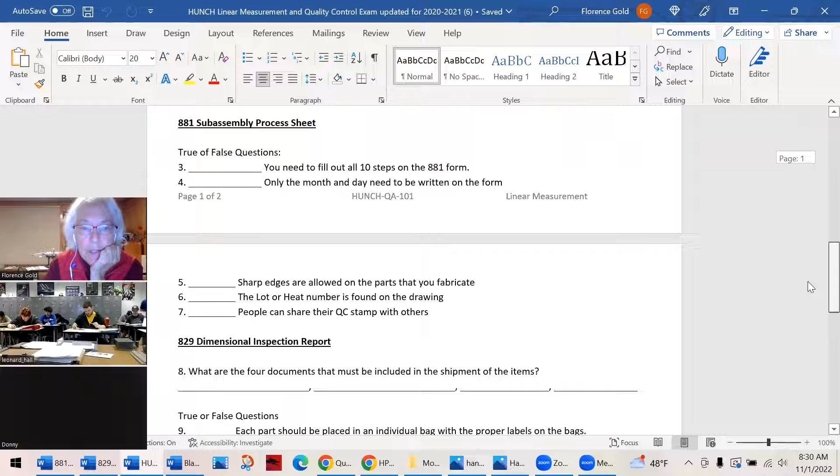And Mr. Hall, you will get to choose who is your quality assurance person. Say that again, please, Paul. You will get to choose who gets the QC and the LM stamps. Okay. Yeah, of course, we haven't decided that yet, but when that time comes, I'll let you know. I'm just checking. I went over all this. I think we're good. Yeah. Okay, that's what I see. Push it.

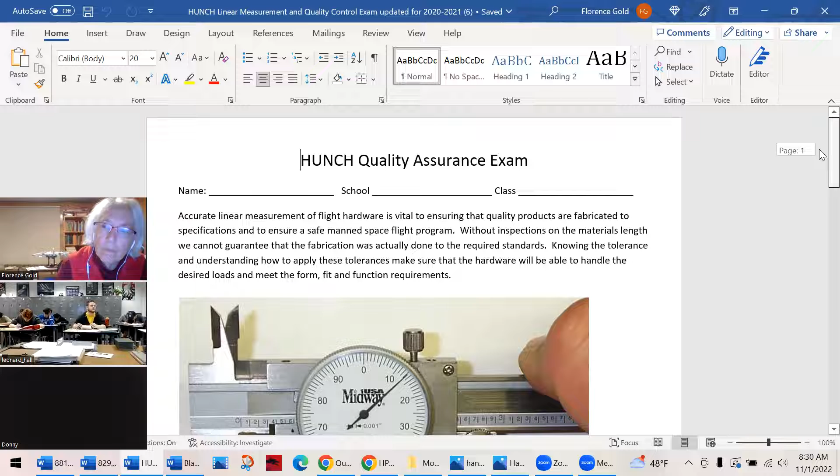Hey, Flo, I think I'm gonna go ahead and drop off then, since you're testing. Okay. Yeah. Wonderful. Thank you so much for joining us. Yes, thank you for inviting me. Thank you. Thank you, Mr. Hall. All right, talk to you later. Okay, thanks, Donnie.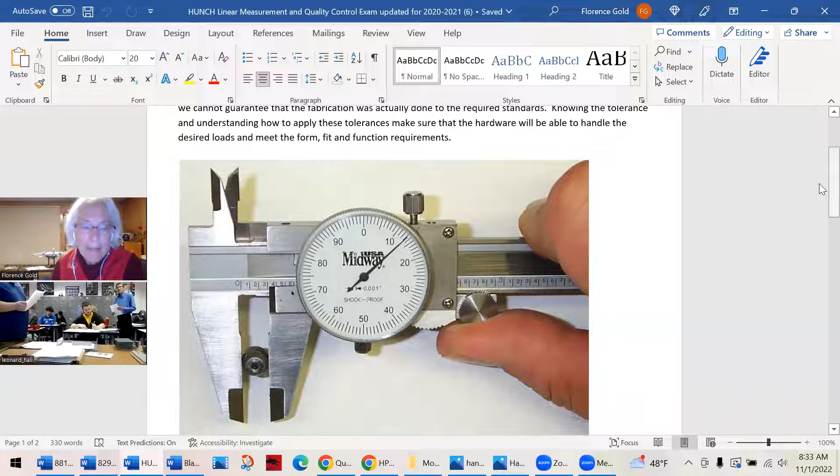Which one do you know? If you can. I'm almost done. Okay. You want to go over this with them? Well, yeah, let's go over them. Is everyone done? Yeah, I'm just checking. Do you want the students to have the test? Or do you want... They can grade their own test if you want, or just pass it out to anyone.

They work for NASA now. We have a high level of trust and great ethics. And we really appreciate your work. You need to make sure you brag about this. If you get 100 on this test, which I hope you all do, you just passed the quality assurance. You could be a quality assurance person for NASA. What we gave you is exactly what NASA uses for their quality assurance. I've had students go right from this class as quality assurance people and work in different aerospace and medical fields as the quality assurance person.

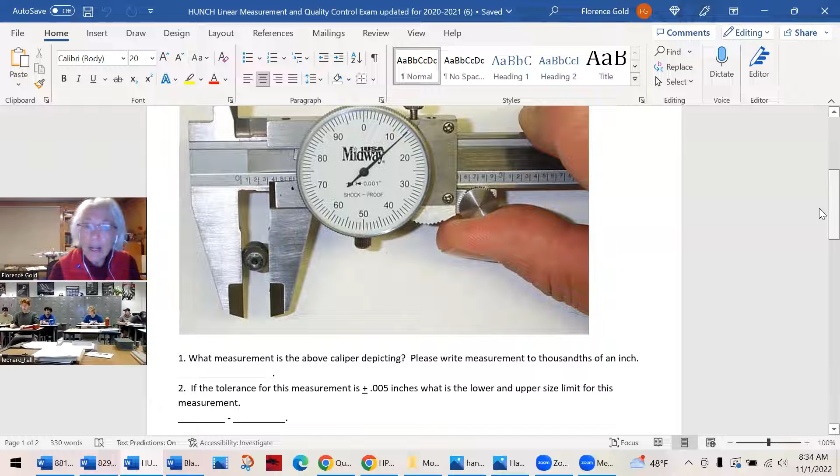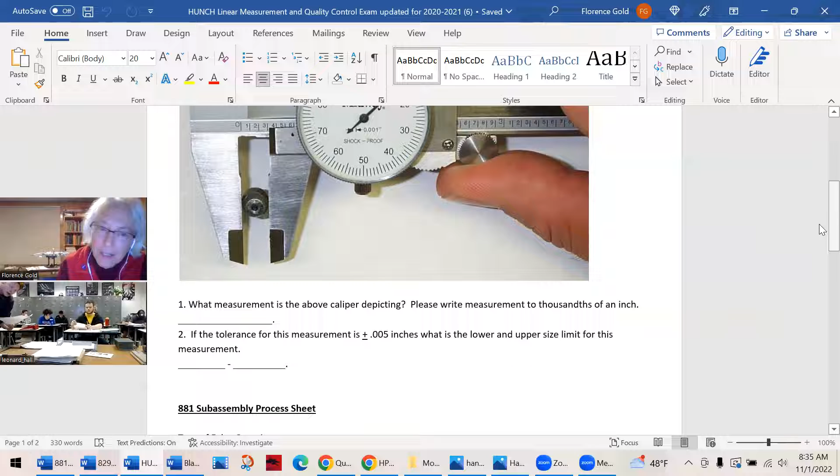All right, well, I got about 5 minutes to go over. Okay, so let's go over the questions. What measurement is the above caliper depicting? Somebody stand up close to the computer and just yell me the answers. 0.313. Correct. Stay up there the whole time. And if it's +5 thousandths of an inch, what would it be? 0.318. Right. And -5 thousandths? 0.308. Correct.

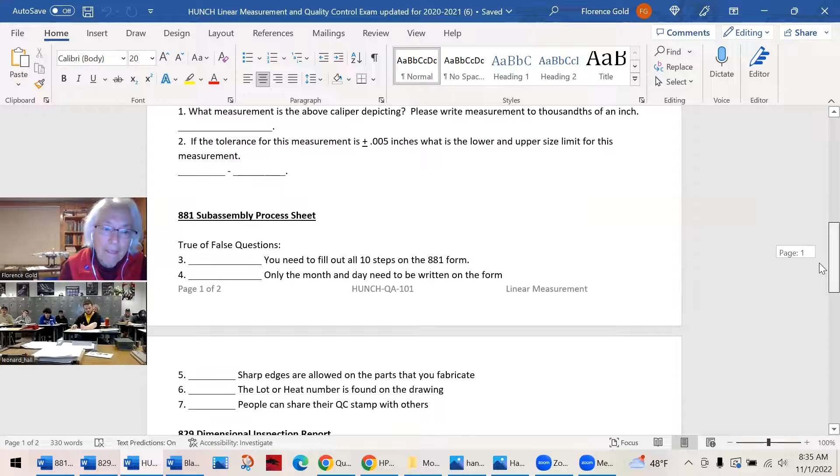How about true or false? You need to fill out 10 steps. False. Right. How many do you fill out? 5. Only the month and day need to be written on the form? False. Right. What do you have to include? Year too. Right. Sharp edges are allowed on the parts? True.

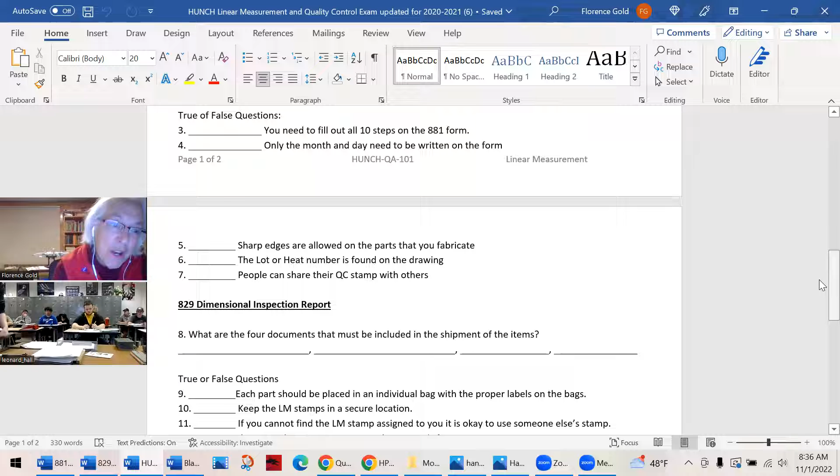Hey, that is actually true and false for your part only. Usually it's false, but you do have a sharp edge on your part. So I will take either answer, true or false, right? Because there's that one edge. The lot number is found on the drawing? False. Right. Where is it found?

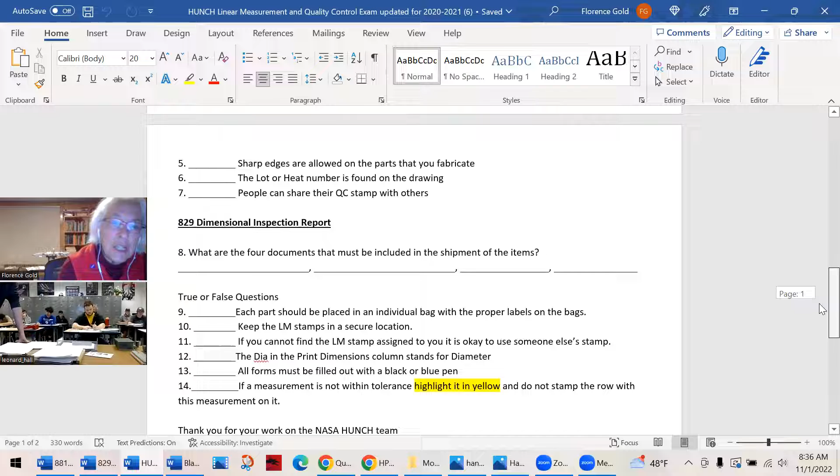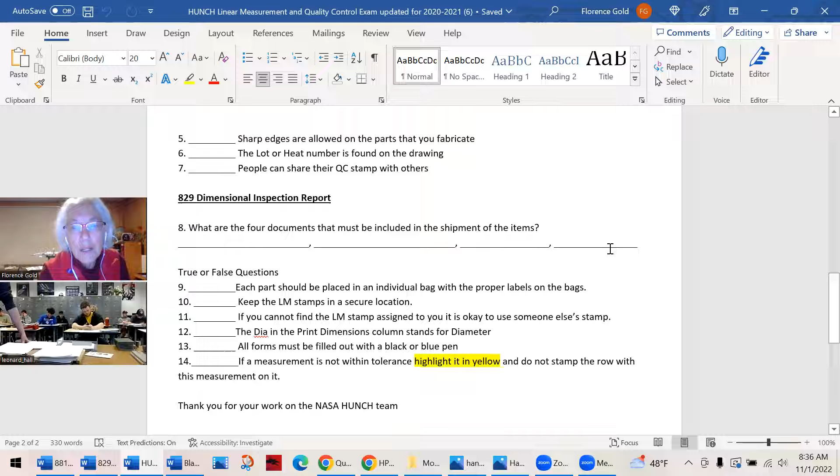COC. COC. People can share their QC stamps with others: false, right? It's your signature. What are the 4 documents? The drawing, Form 881, Form 829, and COC. Absolutely. Did we get that? Each part should be placed in an individual bag with the proper labels on the bags. True. Keep the LM stamp in a secure location. True. If you cannot find the LM stamp assigned to you, it's okay to use someone else's: false, right?

The DIA in the print dimension stands for diameter. True. All forms must be filled out with black or blue pen. True. And if a measurement is not within tolerance, highlight in yellow and do not stamp the row with the measurement on it. It's true. All right, put 100 if you got it all right. If you got one wrong, put -1 or whatever. And your teacher needs to collect them and save them for when Jean comes.

How many of you got 100? Awesome. I could tell you were paying great attention. Thank you so much. I really appreciate that. So keep your notes because you probably don't need this information yet, but you need to review it when you are doing the inspection. Handing the notes in, I'll be grading them and then handing them back. So I missed what you said, Mr. Hall. Handing in their notes, and then I'll be grading it, and I'll be handing the notes back to them. Yeah, that's smart. Very good.